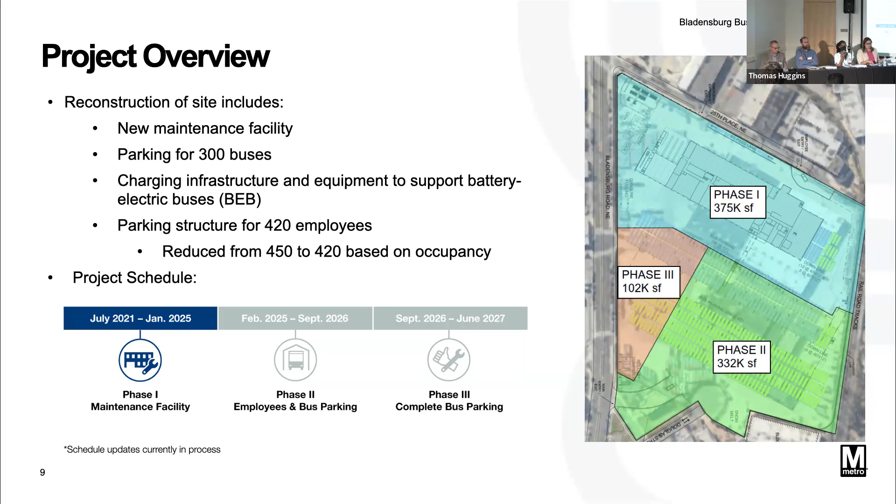During the second phase, shown in green, we will focus on building the employee parking garage as well as some bus parking on ground level. This takes place from February 2025 to September 2026. During the third phase, in orange, we will complete the bus parking area, taking place from September 2026 to June 2027.

We continue to maintain our best practices for cleanliness and noise control on the site. This includes daily cleaning of work areas, waste receptacles and dumpsters stationed throughout the site, and tying down items to prevent flying debris during inclement weather. The site also contains DOEE-approved water runoff controls. We wash muddy construction vehicle wheels to help keep the streets clean, maintain an on-site street sweeper, and pick up trash weekly near the construction entrances.

Regarding noise control, the typical weekday crew hours remain from 7 a.m. to 7 p.m., and we limit hours of oversized load deliveries.

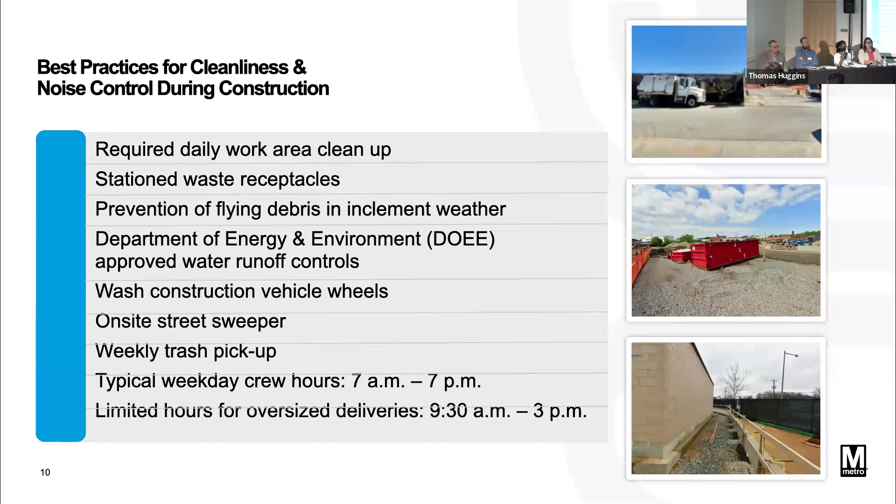So the site is bound by 25th Place Northeast, Bladensburg Road Northeast, Douglas Street Northeast, and the railroad tracks. In regards to construction traffic flow, Gate 4 serves as the primary construction entrance. Gate 4 on 25th Place Northeast serves as the main construction entrance. Gate 1 is also still in use. Gate 2 remains as a secondary entrance, along Bladensburg Road Northeast.

In regards to parking, areas designated for contractors' personal vehicles includes 2122, 24th Place Northeast, and along V Street Northeast. This month, we do expect for the properties near 28th Street Northeast to open back up for limited contractor parking as well.

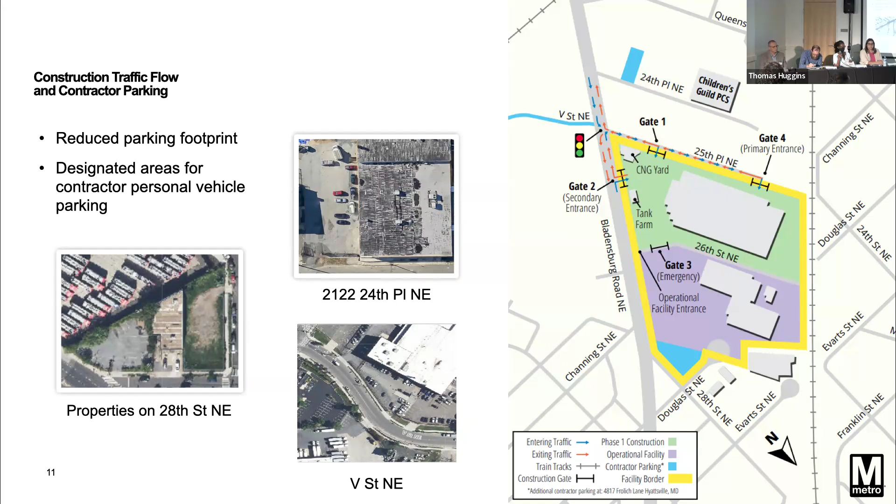On this slide, I'll highlight the newest updates for our permitting status shown in yellow, and this includes continued coordination with DDOT for the closure of the Douglas Street cul-de-sac, discussing Phase 2 and Phase 3 plan reviews with DC Water, and completing a pre-construction meeting and field walk for a new gas line for the CNG yard with Washington Gas.

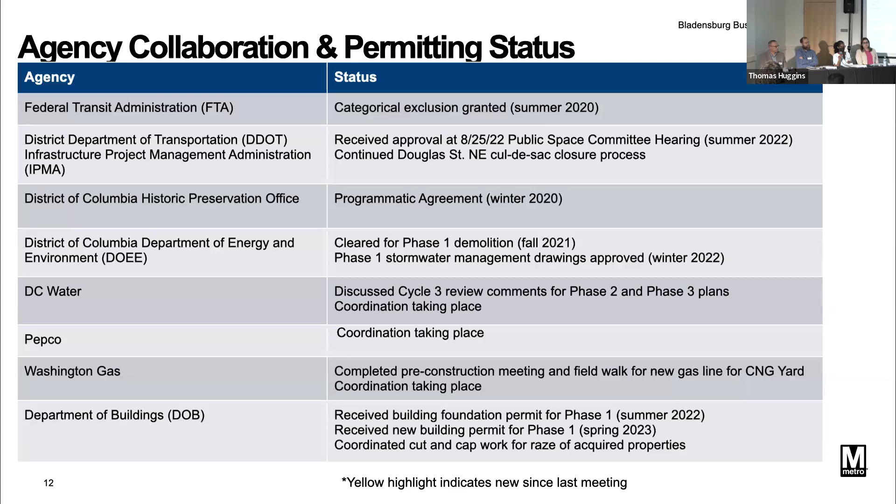This quarter, WMATA held the inaugural Metro Fest to connect with the community, and the event was free to the public and featured food and fascinating ways to engage with Metro, such as climbing aboard the bus into the operator seat of Metro's new battery electric bus. We also released the quarterly newsletter, which had construction updates, trivia, and the people behind the project section, which featured Maya this time.

Coming up on August 17th, the Metro Transit Police Department is hosting a back-to-school event with free school supplies, giveaways, and activities for children like a moon bounce. With that, I will pass it back to Donzel.

Thank you, Jamila. Any questions regarding the project overview or overall update? All right, seeing none, I'll turn it over to... oh, sorry, one online.

All right, Marcy, if you could please come off mute. Yes, I'm off mute. Good evening. So did you want me to wait till the end? Because I can. If you have a question regarding the project overview, go ahead and ask it. If the next section will be the construction, and then we have another final section if you want to ask then. But if you want to ask now, you can. I can wait, thank you.

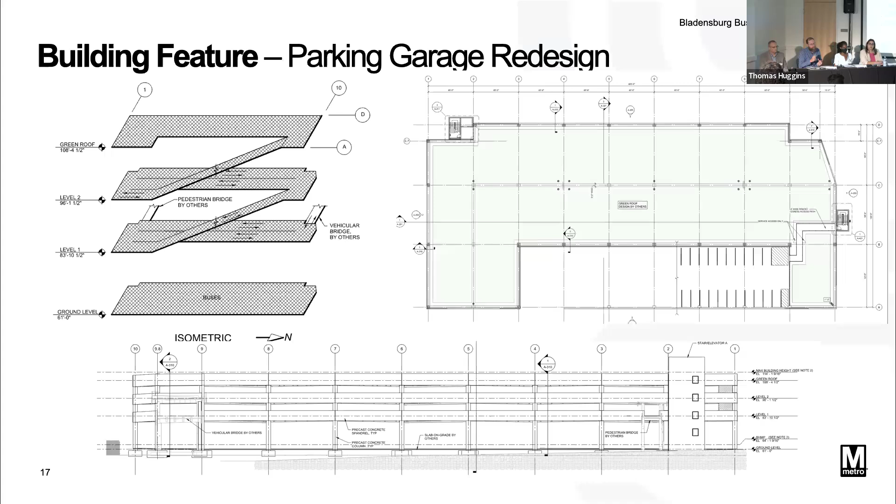And then just on the bottom there is an elevation view. You'll have all the buses parked on the ground floor. The personally owned vehicles will come up to that second level, the one right above the ground floor, through the ramp, and then they'll be able to park there.

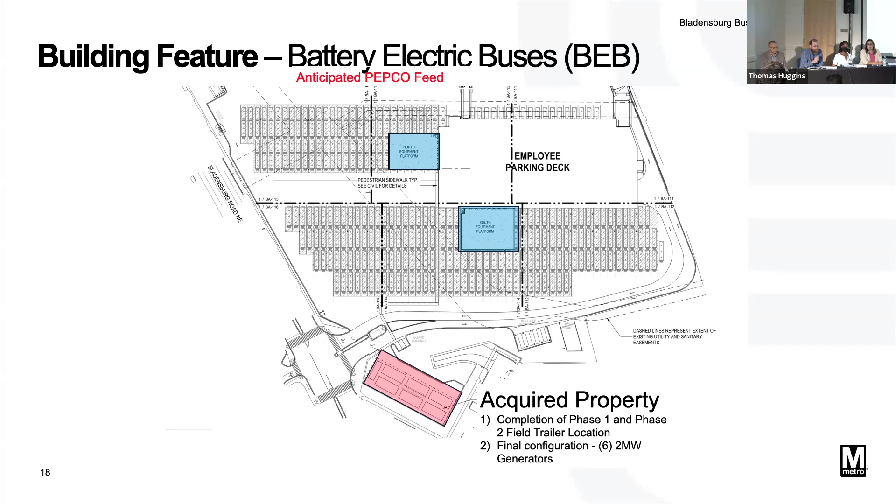Next slide. So you can see here, this is a 3D model, 3D rendering of the parking garage and all of the support steel for the conduits, the electrical charging, the pantographs. You can see it's pretty extensive. And on top of this, there will be some solar.

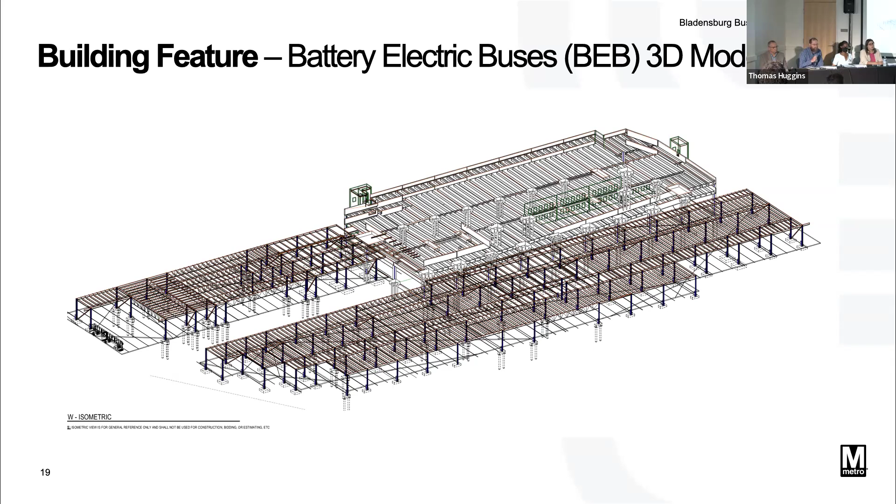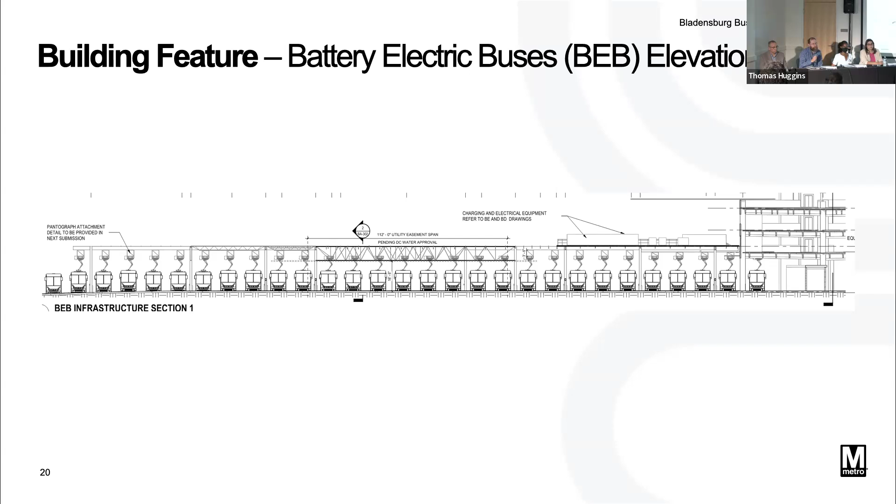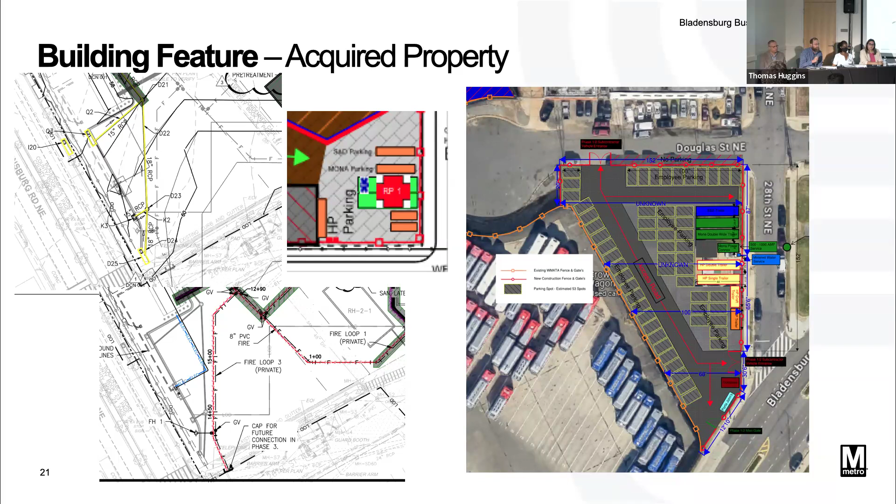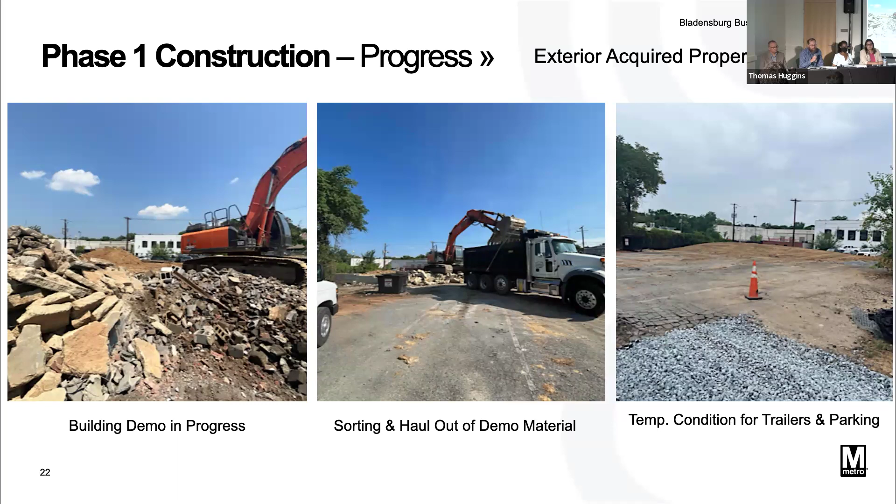Next slide. This was the demo, starting from left to right. You can see the building was taken down. In the middle there, they're sorting and hauling off all of the demo material. This is to achieve additional LEED credits, so we did segregate all of the material to have it recycled. On the right-hand side is pretty much the finished product.

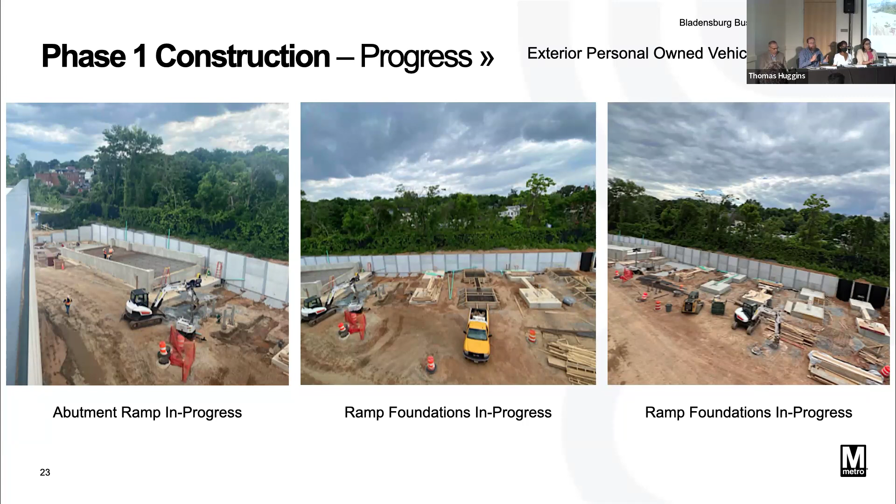You can see the construction of the ramp going in from left to right. That's the abutment ramp that then transitions into a cast-in-place deck with columns and beams. You can see all the footers going towards phase 2. Next slide.

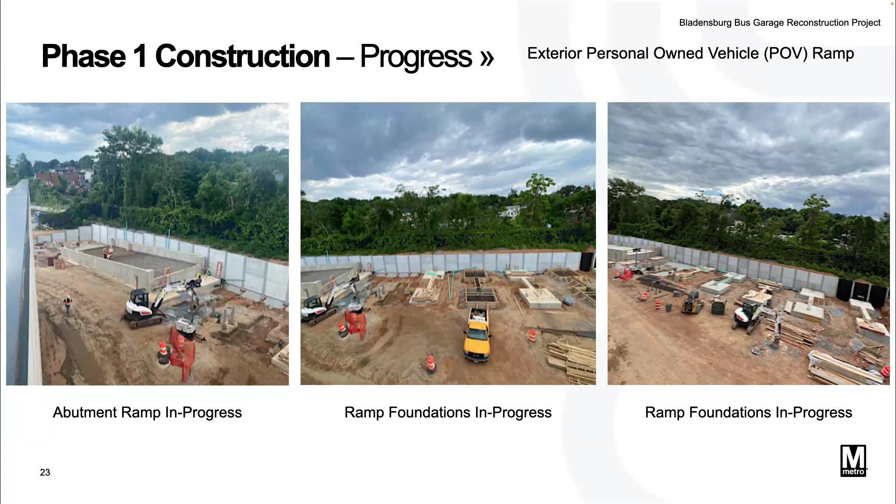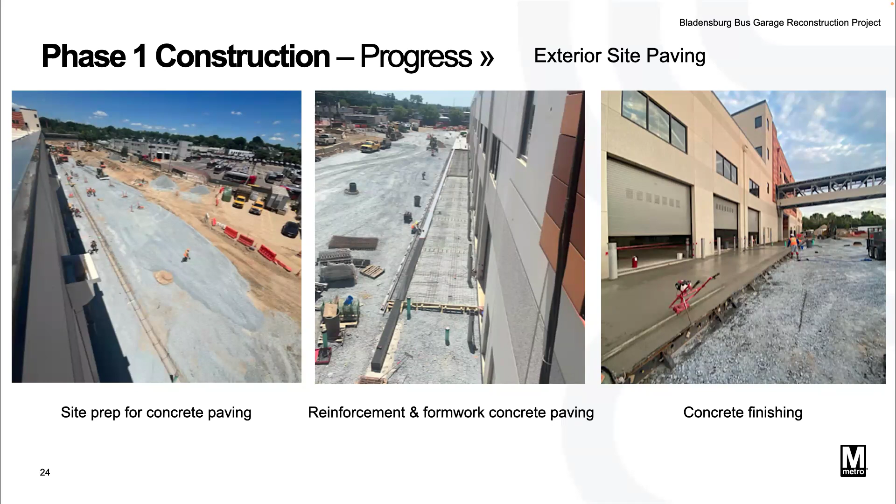We are paving in 14-foot wide sections, anywhere from 100 to 200 linear feet. Right now during the summer months, that keeps our crews in a sweet spot of not overworking them during the hot afternoons, while also meeting our production rate.

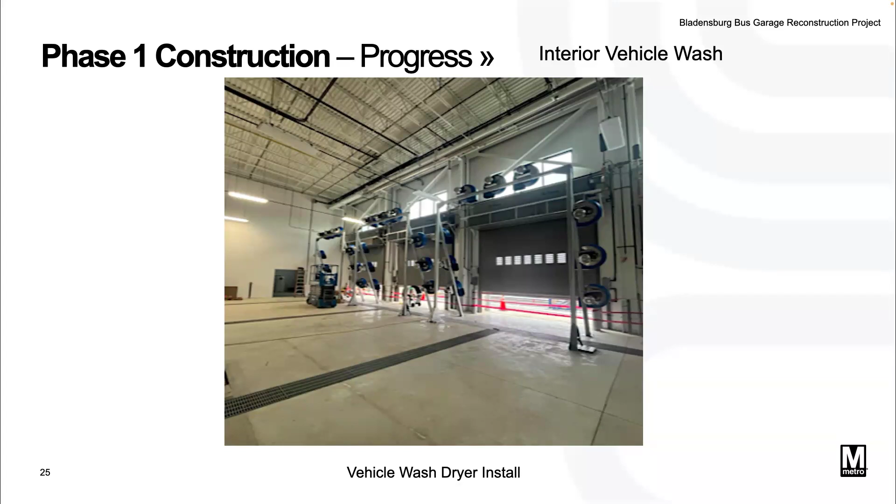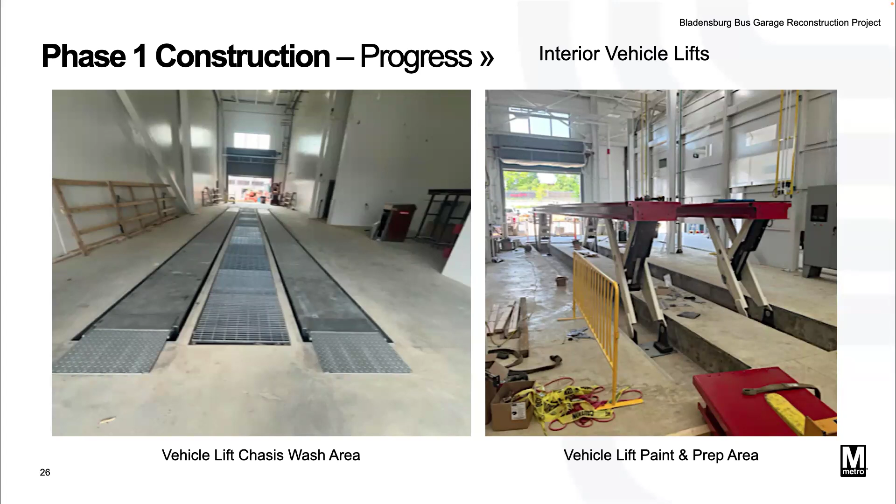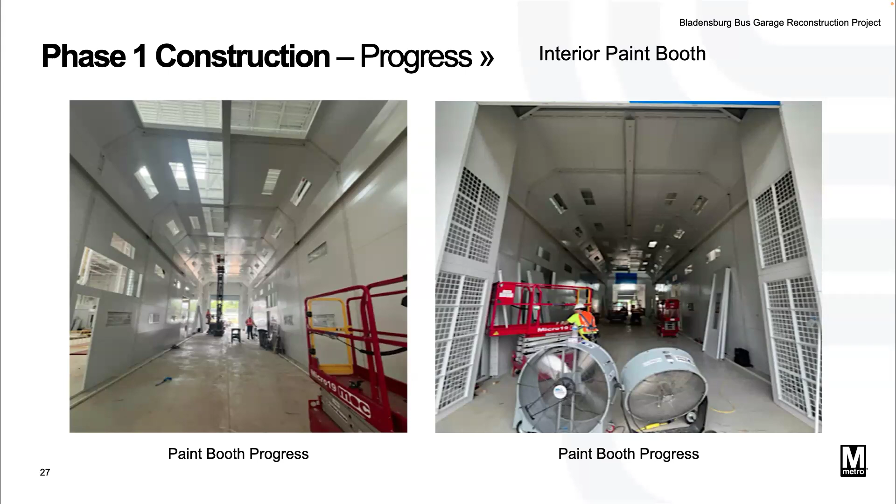I want to remind everybody, last quarter we talked extensively about the paint booth. I know there are some concerns about mitigating fumes. Paint booths are heavily regulated - there are several NFPA and safety codes that regulate that. Also, DOEE has permitted this paint booth. Within the 19-page DOEE permit there are maintenance and operation requirements. They will do normal checkups, as well as list out all the permissible VOC contents for material used in there. In addition, the paint booth has an exhaust fan with several layers of filters to comply with the DOEE permit.

In the interior, again lots happened. You can see here we're putting final coat, finished paint colors on the wall - this is all the first coats yet, we won't put the final coat until the very end.

All the ceiling grids are going in. What this does is it allows all the trades that have ceiling mounted equipment to start their install, like fire alarms, duct registers, lights. So all of that's been going on.

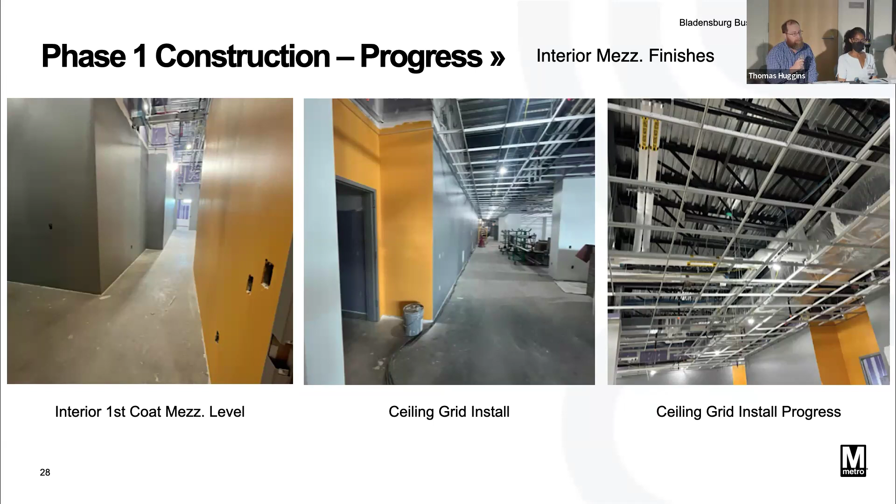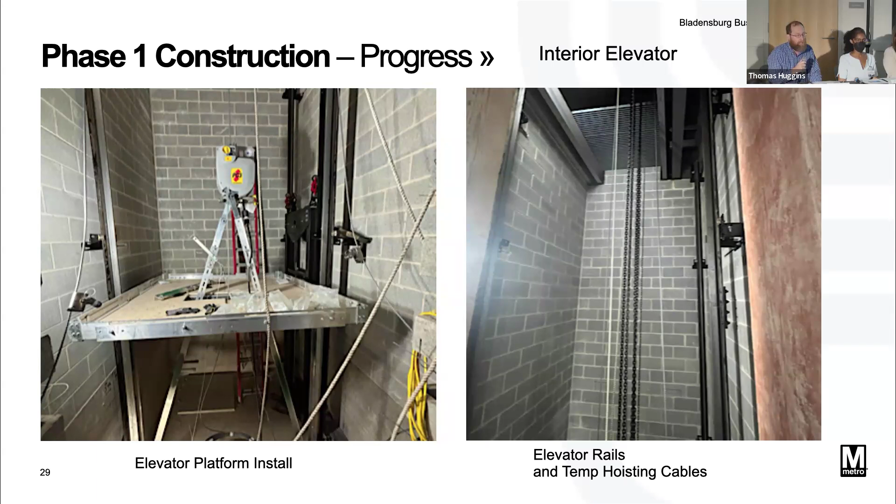The elevator has also shown up. You can see 2 shots here - they have all their rail in, and they have their temporary cab built, so they can ride up and down the shaft as they build out the shaft.

In the boiler room, again, this is kind of the heart of the building. There's a lot of chilling - this is where all the chilled water comes from. Several pumps, the boilers - you can see the action shots from left to right showing how much progress has been made. All of the pipes are insulated.

At this point, Pepco has provided us power - we are energized. Let me remind everybody we have 2 feeds to the building, so this energization is just for the building, not for the BEB, but we do have power. This is our first area where we're actually going to start pushing power so we can get all the pumps up and running to start circulating cold water, so we can start conditioning some of those finished spaces, which allows us to bring in some of the cabinetry, floor finishes, and other temperature sensitive material.

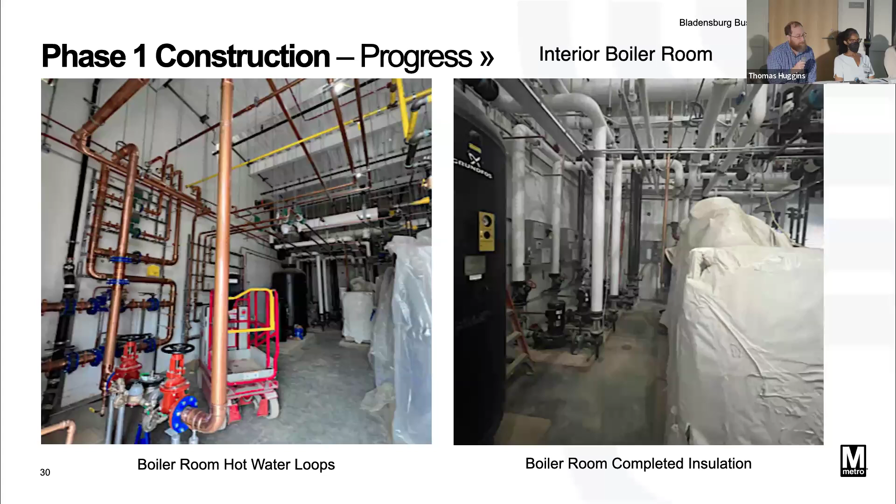I think with that, I will turn it back over to Donzel for questions. We got 2 more?

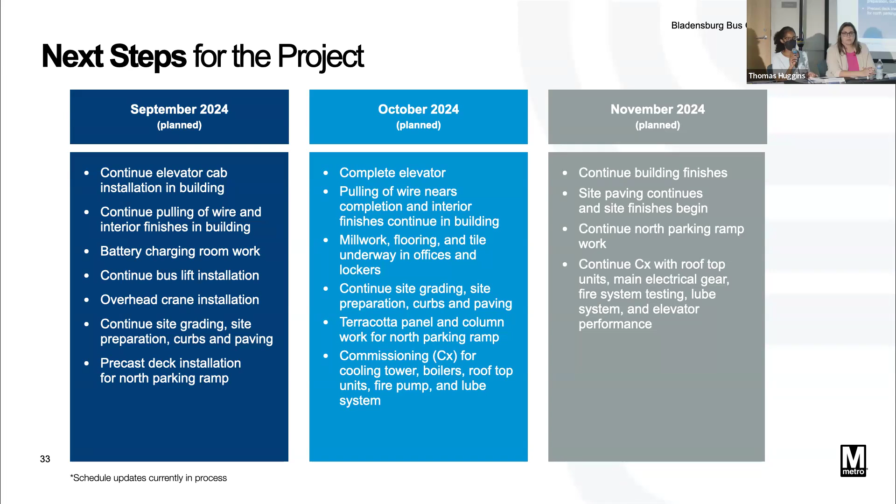And we'll continue to update the community in future meetings once we finalize our time extension analysis. And with that, I will pass it to Maya. Thank you, Jamila.